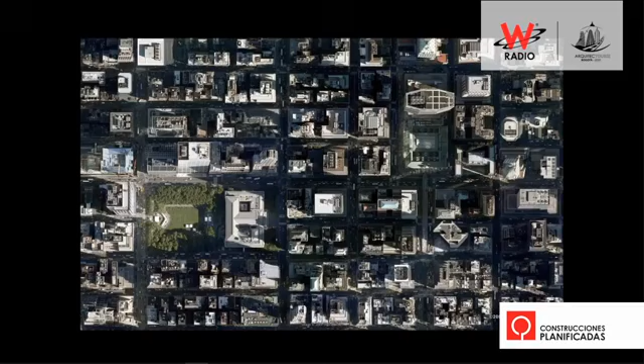First, let's look at the way these giant rooms are made. They exert a great deal of pressure on the city. Grand Central even exceeds the limits of our view as we approach it.

But Mauricio, I am hearing from people that they cannot see my screen. They do not see the slides. Let me see it. Someone is saying they cannot see the screen. I don't know, but I hope they can. Someone is alerting me, one moment. Can you see? Chevy, can you help by checking the screen, please? It seems the presentation screen isn't showing. Okay, now they can see it.

Okay, perfect. So I'm talking about the idea of large rooms, important in shaping the city, and the analogy to great interior rooms. It is this reciprocity between architecture as it makes great rooms and the way the city itself forms great rooms that I'm most interested in.

So here, a great interior room, Grand Central. Here, a great exterior room, Bryant Park—just as important as the great reading room in the library next to it. This analogy between rooms, inside and outside, this is one issue.

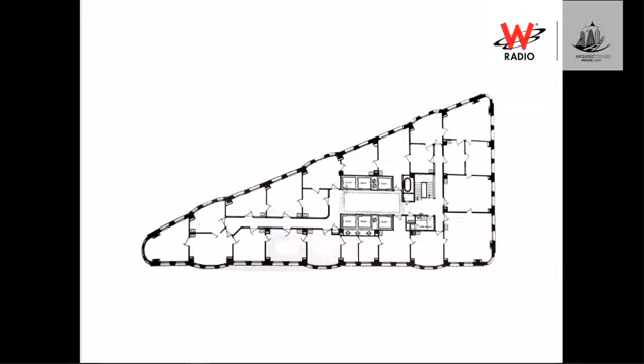This is the Flatiron Building, like a hinge that pries Broadway away from Fifth Avenue. Look at the way it distorts and transforms the plan of a typical skyscraper. And now we look at the Barclay-Vesey Building in Lower Manhattan. It's a parallelogram in plan, and just beyond it is the great Woolworth Building, the orthogonal version of the Barclay-Vesey. The Barclay-Vesey is like a distorted axonometric drawing of a more typical, idealized building.

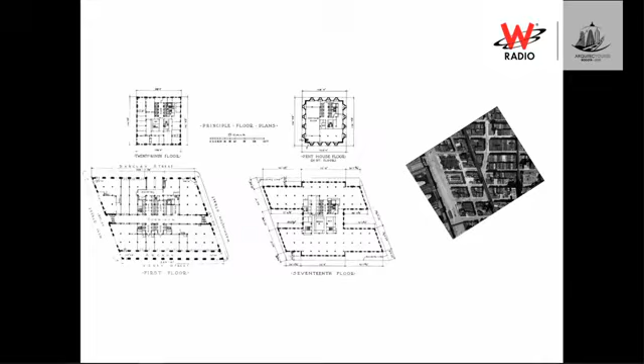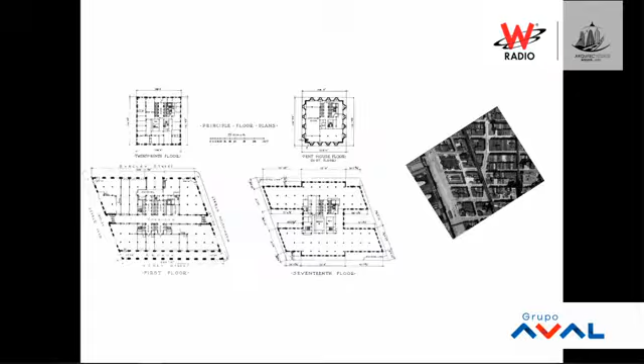You can see how the plan is wrapped by the plan of the city. The interior articulations, even to the level of details, are struggling with the negotiation between what has to happen to various rooms and how the whole building is shaped according to being part of the city. This reciprocity between rooms inside and out, and the way buildings are formed to be part of the city—these are two ideas that have been shaping all of the work I've been doing.

Let's look at a remarkable thing that happens when a very different paradigm of urban interior space is made by Frank Lloyd Wright. This is a space that brings into it another idea, even more important one could say than the great rooms of New York, which is the sidewalk. The sidewalk is extended into the interior and becomes the means to move through a great room, to rise up into this enormous room to witness all of the art and people in it. So he has made a room out of the sidewalks of the city, one continuous spiraling sidewalk.

This is such a deeply inspiring idea, to draw the city into and reform architecture in this way, creating a whole new paradigm for the museum. This is the moment when the city transforms what an institution really is. In this sense, for the first time, we have the gallery, the giant cabinet of curiosity, a kind of single room that collects so many things and becomes scaled in a wholly new way.

This was the inspiration for the first project. I will show you the Tel Aviv Museum that Mauricio mentioned to you. It's exciting to have art and people together conjoined with an experience of movement, and to bring light into a building in this way.

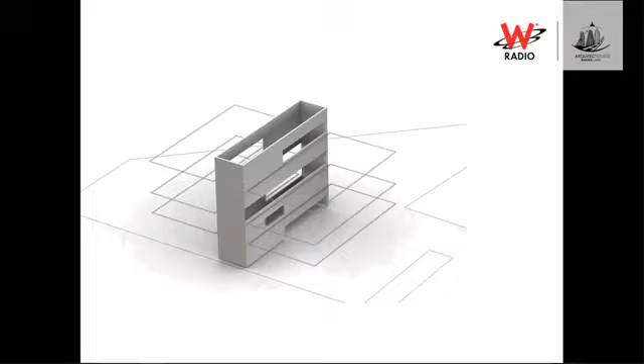It's a building that needed to be this way because it is very tightly packed in the city, shaped by the city in the way a building like the Flatiron is. A building so compacted, establishing a sequence all around it to the plazas and gardens around it. And then on the inside, because it is so deeply embedded in the ground, half underground, it is burying many of the galleries, and a light well is developed.

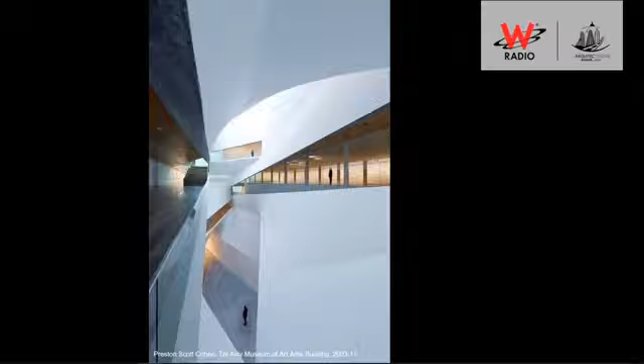That will turn and reflect light all the way down to the lowest reaches of the building. And so when we are discovering this space, we're actually in the middle of it when we arrive, halfway between what is above and below the ground. We're captivated by this interior experience, in a way unmoored and disconnected from the normal life of the city.

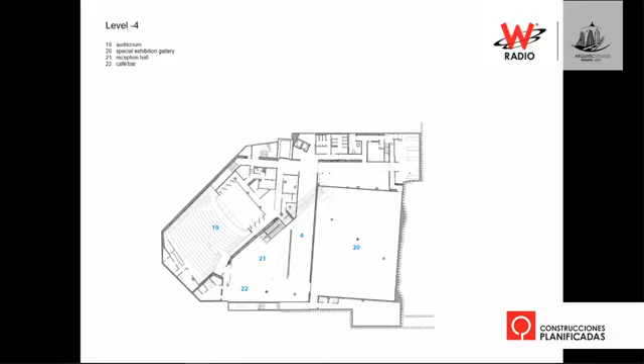This is because the plans are stacking up and rotating to different angles to adjust themselves to the site, producing this idealized form at the heart of the building, which becomes a new way to exhibit art. You will see many wonderful artists have responded to this space, doing critical installations—even an installation that totally radically alters the building as a critique of the building. This one by Mahama.

A building in Bogota. Great project—I've enjoyed so much working with Mauricio and his team at Construcciones Planificadas. It has been an incredible experience.

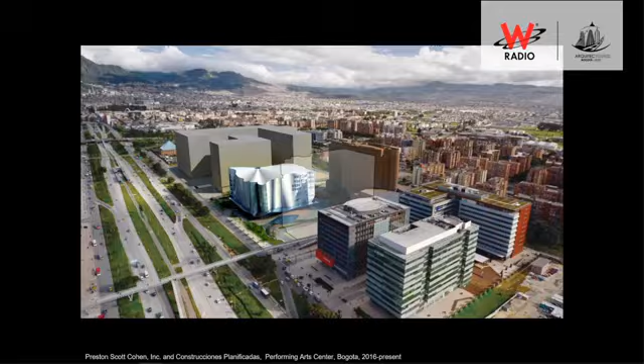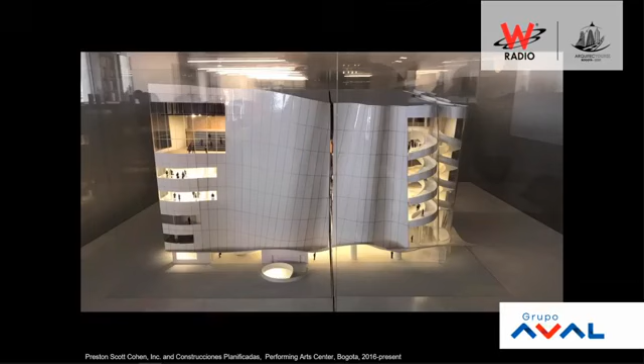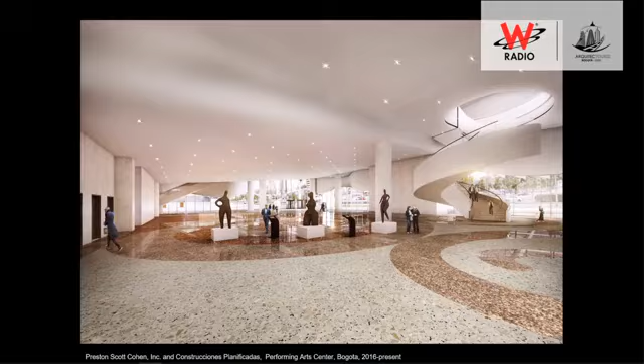Again, a building which is compacted by the site very densely. The site could barely support a performing center of the scale that we wished to put here. And so, like Tel Aviv, something very exceptional had to happen. The first thing was to lift the building and create an enormous interior lobby that flows directly in from the plaza. This displacement, this lifting of the theater, becomes something that makes it very distinguished from other performing centers of this kind, because we move into it and discover a sequence of such power and drama.

And we rise up into a plan that's constantly changing, as Tel Aviv's does, but in a very different way—very organically compacting the theater into a complex and interesting sequence of lobbies and public spaces for people as they move up to a second theater.

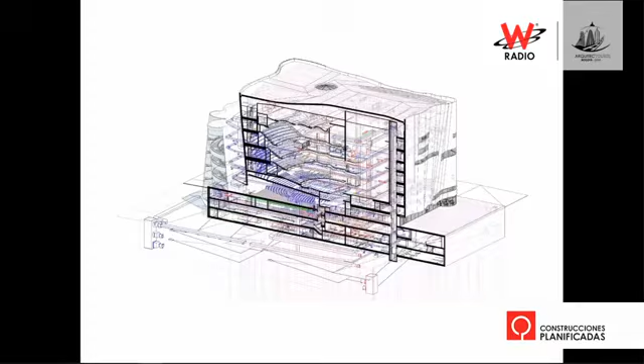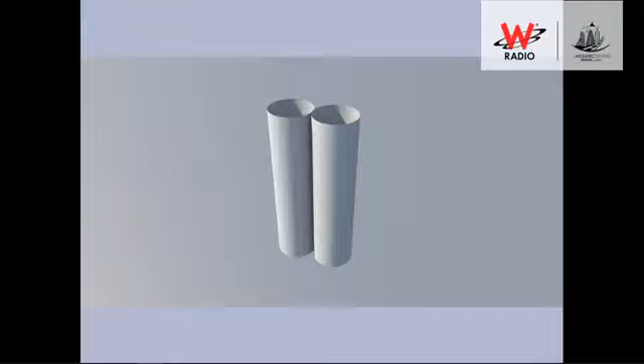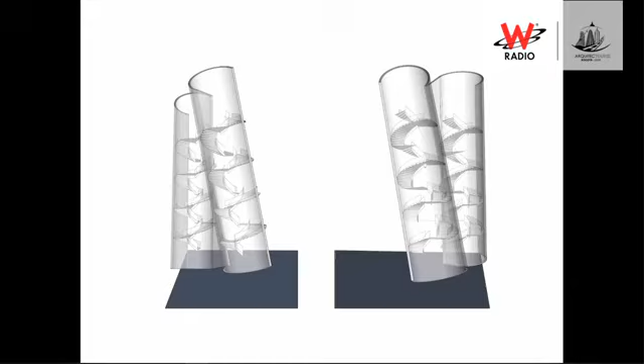You will see that this drama of the section is reformulated inside the primary performing space itself. It is this corner, this exceptional moment where two cylinders are rotated, only touching on a single point—two very extraordinary staircases, one to ascend and one to descend, very effective for social distancing, with a one-way experience of going up and coming down, and the two stairs creating a continuous form.

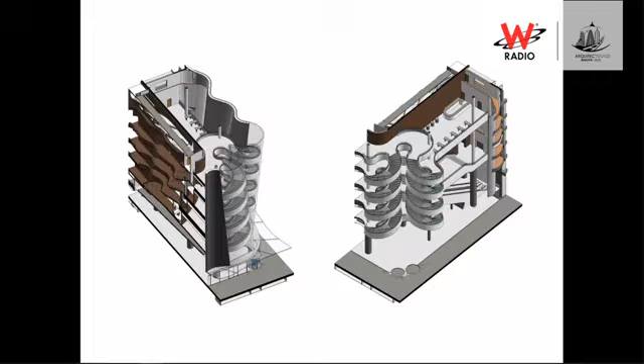This is an incredible experience to work on. Carl Dworkin in my office has modeled all of this to a very high degree, first in Rhino, then transformations through scripting in Grasshopper, and moving it into Revit, working with Santiago at Planificadas.

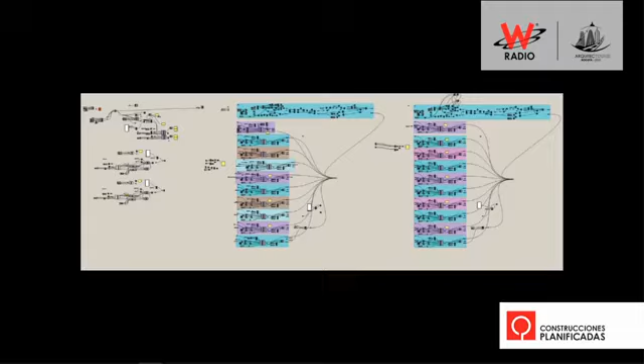It's been a very intense experience to understand how the parametric formation of the interrelation between the facade and the internal dynamics of the form, compressed by the city, have played out, like a curtain opening.

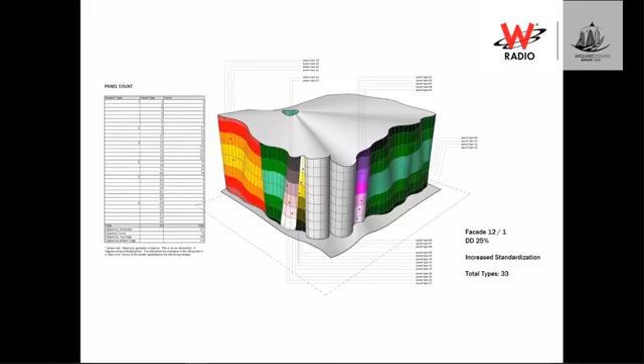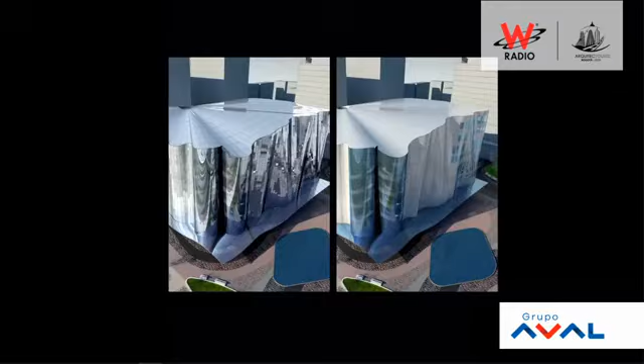Here you see transformations of the facade and how it was developed to be rationalized into a series of panels, of a certain type, reduced in number to give it efficiency even as it appears very complex. It is made of very few standard types of panels—another part of our effort to negotiate complexity with efficiency and standardization.

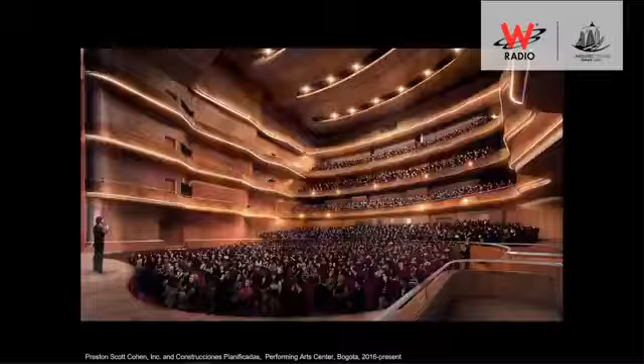The problem of thinking about the drama of the interrelation between the site and the interior space that gives life to the institution moves out of the city, but the same sensibility continues.

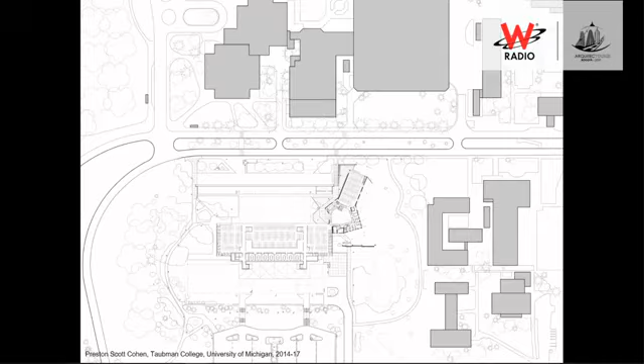Here at the Taubman College at the University of Michigan, we have this very enormous existing building to which we are adding this exceptional smaller piece. This piece has within it a very unusual space, a dramatic atrium, which turns the building in the site, reorients it toward the street, reaching it, stretching toward it.

And here you see an interesting resemblance to sawtooth warehouses and factories that are part of that context in Michigan.

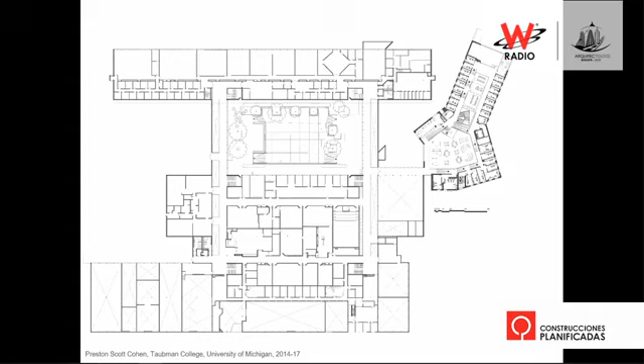But it is this enormous and interesting atrium that I want you to look at, and the way that by being a six-sided shape it can pivot the building into a very specific position to establish a sequence through the context, and really interestingly establish a new center to a building that never had an interior center.

This great room now is the social center of the whole school, even though it's on the edge of this complex. Two ramps, stacked and obliquely tilted since they're sloping, are bound together by a single staircase.

This kind of knot, again like in Tel Aviv, provides continuity between all of these levels, with different experiences on each—very different programs and different geometries defining the levels.

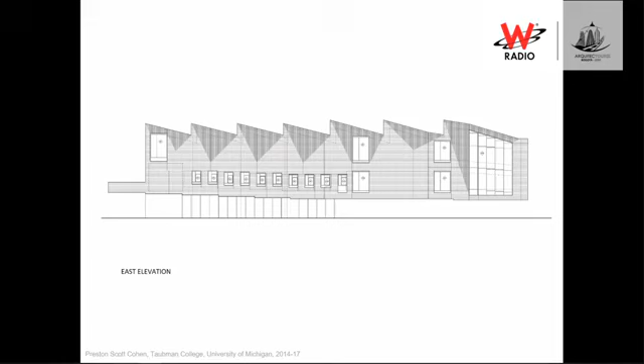Again, the panelization you see here is based on constraints to build with great efficiency, but within a very dynamic form nonetheless gives shape.

It almost looks like two buildings twisted over one another, just like Tel Aviv, but in a far more compacted way. The stair is very effective in creating this illusory experience of two buildings literally overlapped and turning relative to each other.

Again, the study of light is so important here, the reflection of light, as in Tel Aviv, but in this case to create this remarkable studio for the students. We actually tested the idea in our own studio in Cambridge, which has exactly the same angle and reflects light the same way, coincidentally.

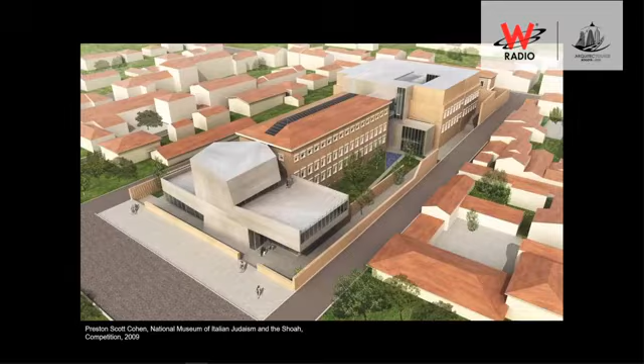It becomes a forum, a place of great excitement for students, for events, changing the life of the school dramatically. And we've done numerous projects where a main room is the focus, the addition of a room to a building that hadn't had one before.

This is an example for a museum in Italy. This is a really exciting project, again multi-sided, six-sided geometry, coincidentally—the transformation of a beautiful synagogue in Springfield, Massachusetts, Temple Beth El.

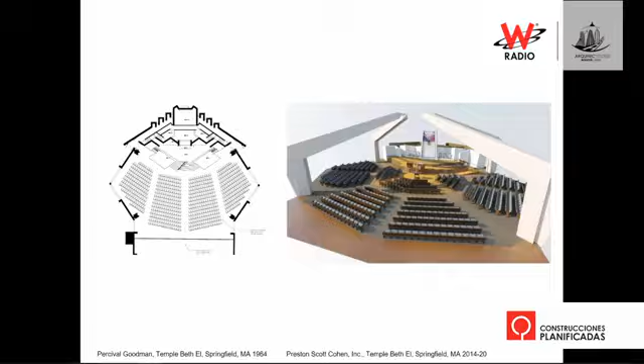Here, the transformation is much more subtle and powerful. We're looking at a building that had, on the left, you can see originally frontal seating. It was built in the mid-century when temples were very large in the United States. Today, we're trying to create a far more intimate environment—we are creating what we call a chapel within the sanctuary.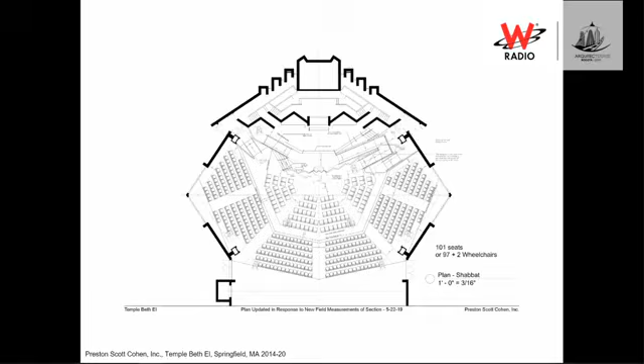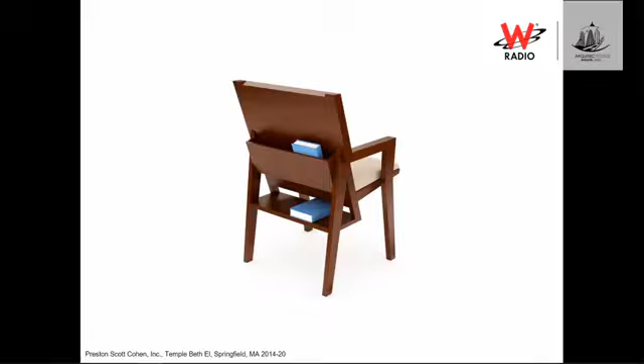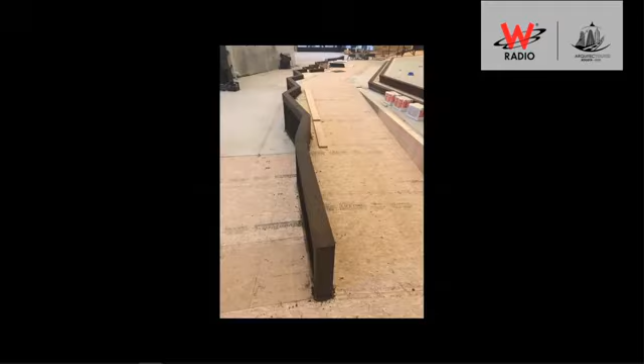This area for the services that occur weekly, the Shabbat services, is nested within the much larger context of a synagogue that can support the High Holy Days services, up to 600 people, while this smaller part holds only around 100. It's the very fine tuning of this part of the synagogue called the bima, and the way it becomes accessible by means of this ramp, the delicate railing, and the form of its own special platform.

That became very essential as we redefine the core of the space and make it concentric rings as opposed to frontal. The transformation from frontality to concentricity, space in the round, is a very powerful dialectic in architecture—whether a space is about forward-facing orientation versus moving in the round. Think back to Frank Lloyd Wright, a space developed in the round, versus earlier museums, far more dedicated to sequentiality, frontal movement, proceeding linearly.

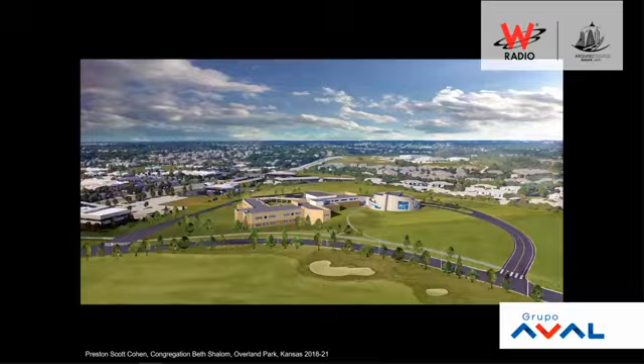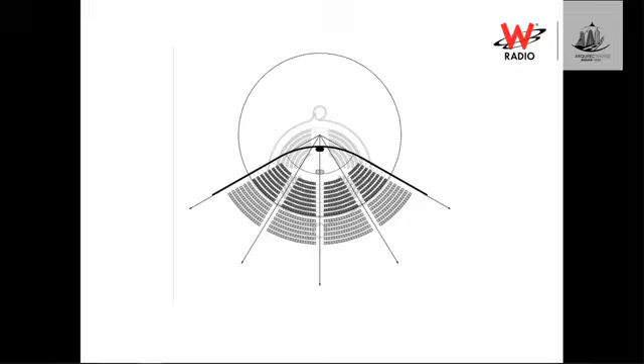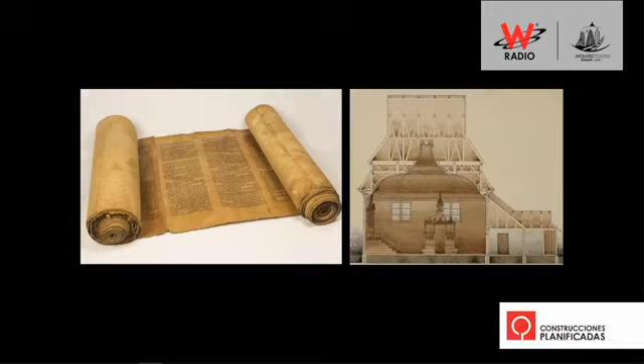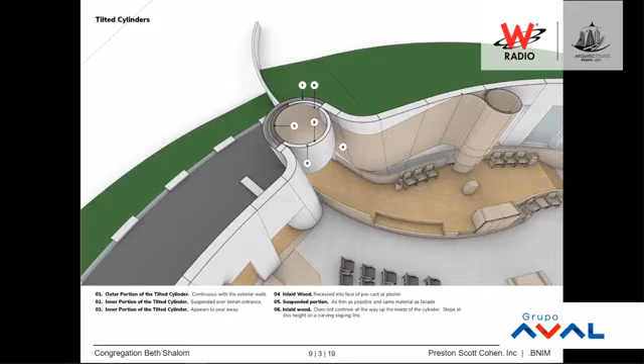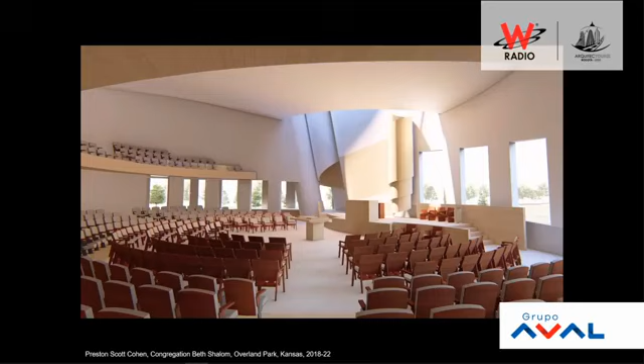The complexity of the form is difficult to contend with within the economy we're looking at here, but given the studies we're undertaking, we are reducing it to its essence. You can see the ritual of the bima is very intricate here, and the connection to the existing building is complex. The building has a very intense relationship with the ground, which is drawn into the interior, and this sense of collectivity intensifies the experience of the chapel within it.

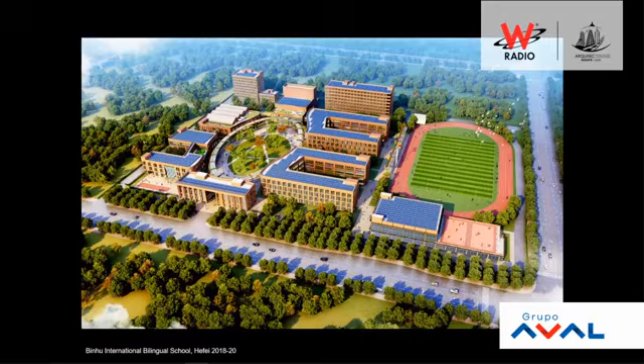And now scaling out, remembering this idea of the analogy of the great room of the city and the great interior room—you can see that while we were working on these two ellipses, this idea is very strong again. It's not so unlike imagining Bryant Park and the great reading room.

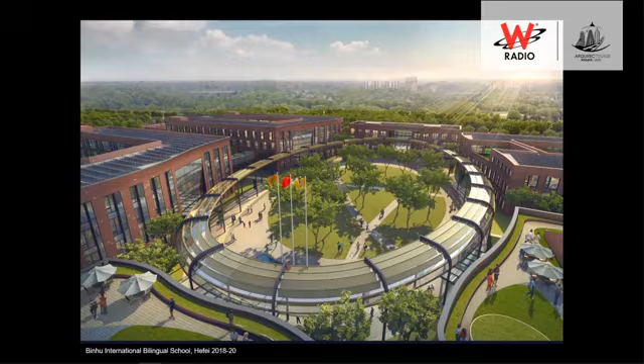Now we're talking about the design for an entire campus. This is an international bilingual school, K through 12, in Hefei, China. We designed the entire campus. It looks rather traditional to you, but this is a very radical idea for one reason: it has a single large yard in the middle of it, which is not typical for these schools in China. Usually the yards are broken into much smaller parts and distributed. We've centralized it and given it greater presence, making it a collective space for the entire campus.

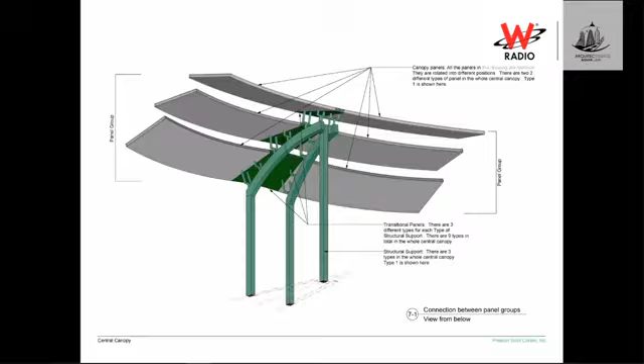It was thought that would push the buildings too far apart, and the client was quite uncomfortable about it. But when we made this an element of connection, they began to become excited about it. And it is, of course, this canopy that becomes so significant. Remember the Guggenheim, the linearity of movement that defines a centralized space—we're doing that again, but now we're on the outside, using it to connect the buildings and to accelerate movement and create excitement.

You can see how it exerts pressure on the buildings all around it, distorting them in a particular way, as if they are reciprocally formed by the urban idea. There again, that idea comes back: the city reciprocally forming architecture.

And occasionally a coincidence occurs. This was just a little bit earlier, an oval yard again, but we are only on the edge of this yard, offering this very exceptional building, the auditorium, the performing center for this small campus in Beijing. A curtain lifting, but not in the same way it lifts in Bogota, and a very steeply inclined auditorium.

Now to go back to New York, I want to shift to something—not only the street as the linear communicative social space, but the park, the linear park. We see Riverside Park on the left here, and we see that it becomes the High Line on the lower left. But there was another idea to extend this to become interior.

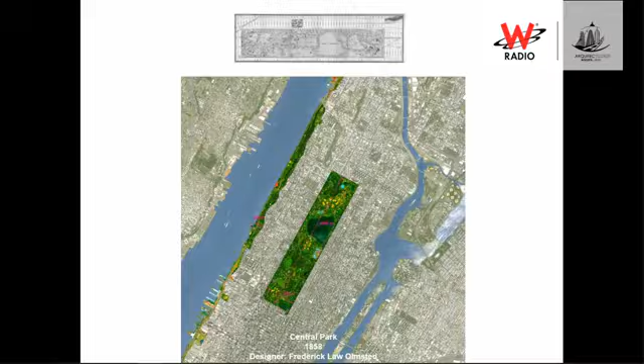I want to show you also the linear parks of Boston. They're very powerful and beautiful, again by Olmsted, winding their way through the city, offering a different way of moving through and connecting neighborhoods.

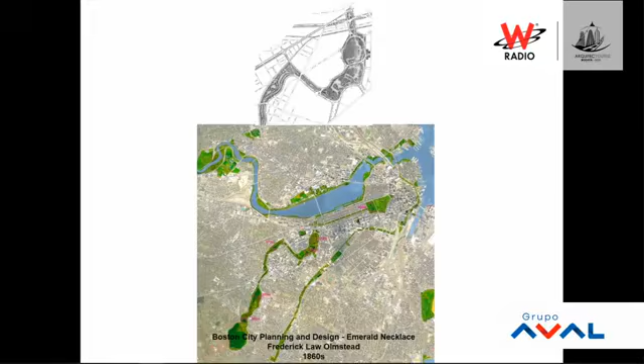Now the linear park has taken over many of the linear corridors of the city itself. The great streets are becoming parks.

And it is that combination, that transformation, just as Wright transformed the museum by bringing the sidewalk into the museum environment, now we see nature moving into these linear streets and redefining them as parks in a way.

We took this into the interior, at least as a concept, but keeping it outdoors.

This is the Goldman Sachs Arcade. It's adjacent to the World Trade Center. After the 9/11 disaster, this whole area was redeveloped. And there was an idea to return to the traditional arcade in this environment.

But an arcade, which is open air, we hadn't had those for quite some time in New York, not in this part of the city. And thank goodness it is for COVID. Again, the linearity works well if the traffic through it is regulated.

So we have the indoor lower ending to the High Line. It's the culmination, in a way, of this linear park across along the western side of the island into this corridor. It releases you into Battery Park, just south of here.

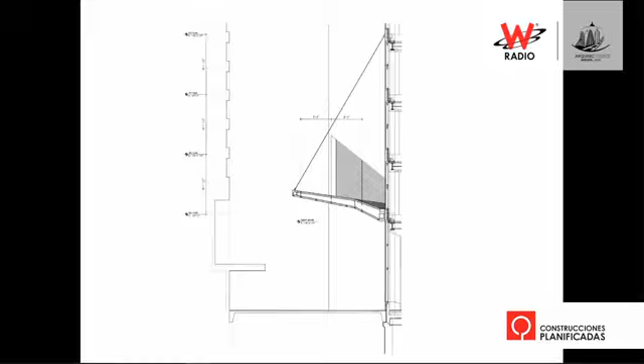This form is folded and is compressed by the buildings adjacent, which are bending. Again, a space that is shaped by the city. And you can feel that, the power of the city, which is forcing it to fold in its particular shape.

That is the beauty of this space. It seems to be as much composed by the city as by a geometric idea. And this extends out, again, moving out from the city with the same kind of thinking about it.

A linear path across a bridge in Taiyuan extends and develops a sequence through a museum. We pass through the building, but we remain outside of it, with views of sculpture, gardens, and some hints of what's happening inside. This sequence is what shaped the geometry of the building.

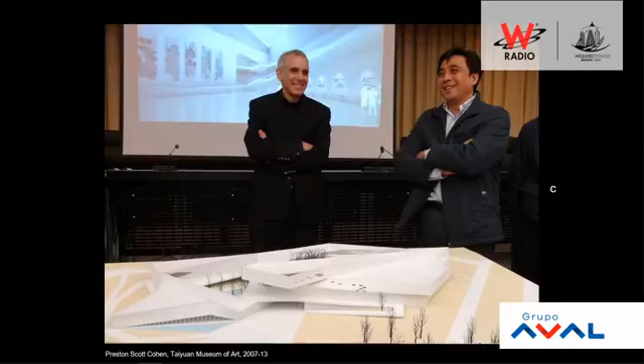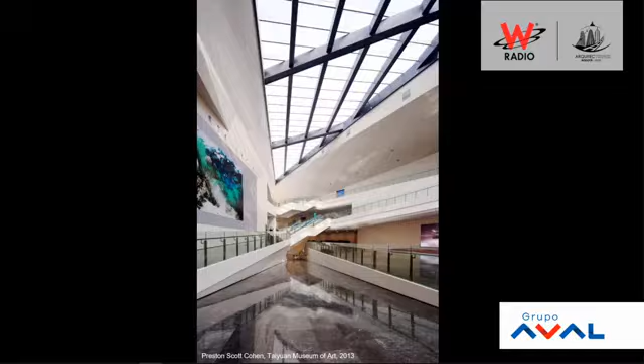And you can see that the building seems even to be squeezed by this linear element, this linear ramp. Again, on the interior, an analogous idea—it's almost like another version of the outside on the inside, a ramping form.

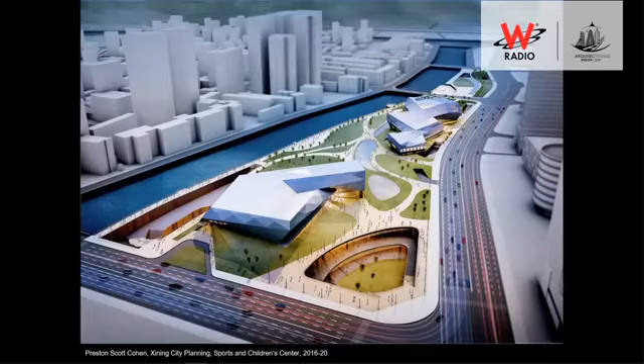Another project in a kind of riverway. This is in another city in Western China. And you can see how the buildings tumble along this riverway-like face.

This is just completed. That is an actual building, not a model, though it looks like one. Kind of remarkable to see it just freshly unveiled, having been scaffolded for about 3 years. This was quite a surprise to see.

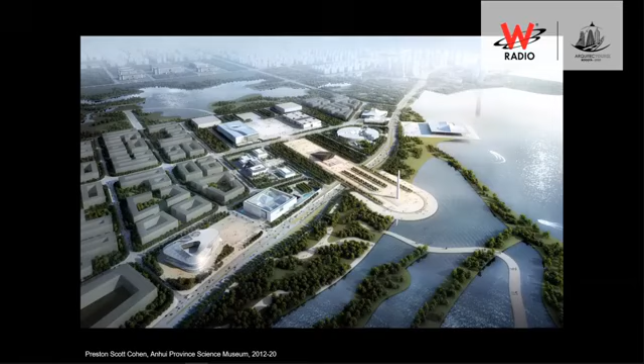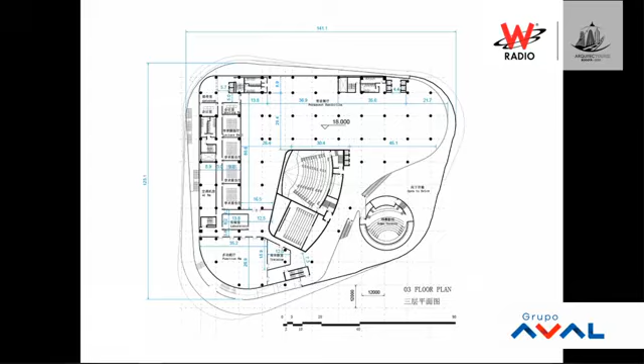And now under construction, in this riverway, actually running parallel with a much larger body of water, is the Science Center in Hefei, a building which turns inward and is primarily dedicated to the articulation of a space in which there is a very exceptional theater. It's a theater, of course, which is more than only a theater.

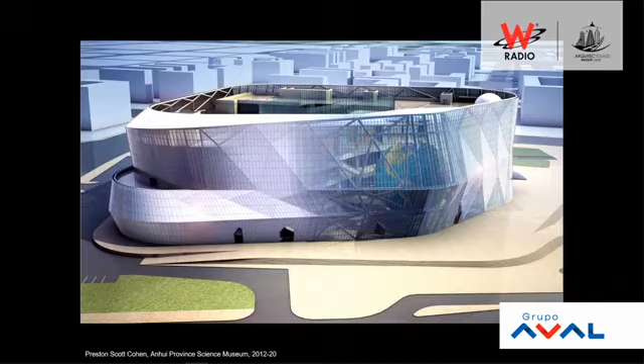And it also is a globe on the outside. It's a kind of incredibly interesting idea that we're still working with exhibit artists on. The geometry of this building developed around these very special moments, one of which will hold that theater as a sphere orbiting, implicitly orbiting around the building.

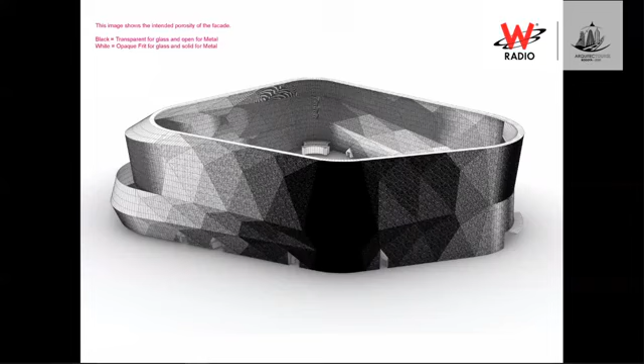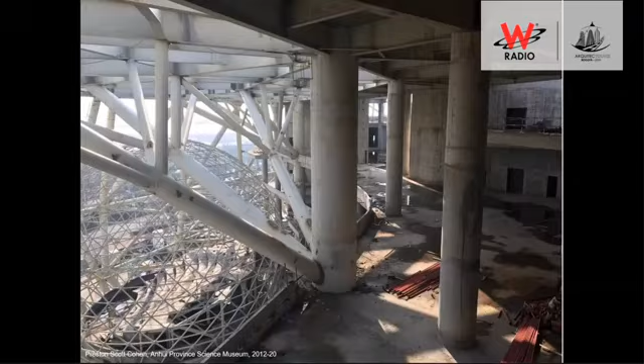This building has an exceptional impact in its scale, addressing a kind of territorial scope of space that it wishes to claim views of. It's really wonderful to see architecture foregrounding that remarkable expanse beyond.

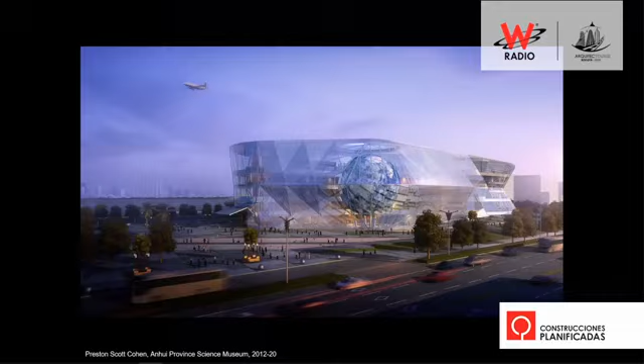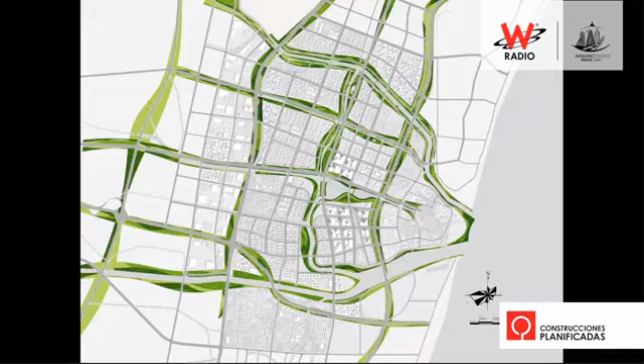And finally, we're moving out completely, networking these arterial parks. Imagine a series of riverside parks or highlines lacing through a city. This is a plan for a new city. And these parkways, something like the Emerald Necklace in Boston, become a network for defining different districts.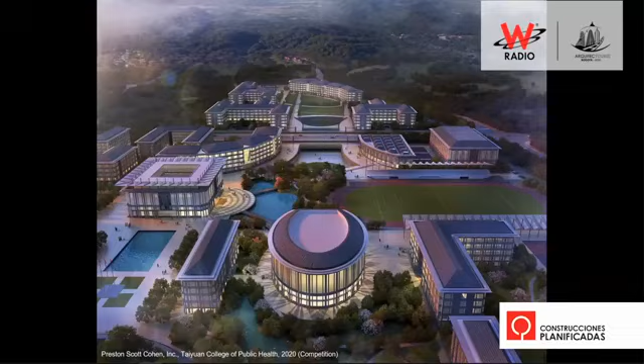At a more localized scale, we are developing that for another campus. You can see how the negative space is moving through, even as there's a kind of rigid, almost Beaux-Arts plan. Nonetheless, the park is something more dynamic.

The compression of this site forces, for example, the sports field to kind of invade the primary axis, as you see here on the right, disturbing the flow in an exciting way, so that it is a kind of synthesis between the picturesque Olmsted type of planning and the Beaux-Arts classical planning for campuses like this.

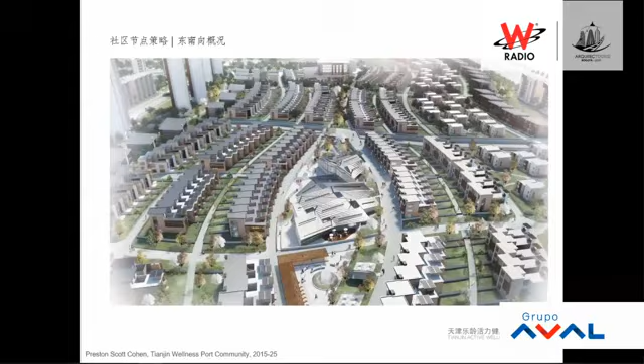Swelling and contracting spaces, crescents. I would say the inspiration here is from London.

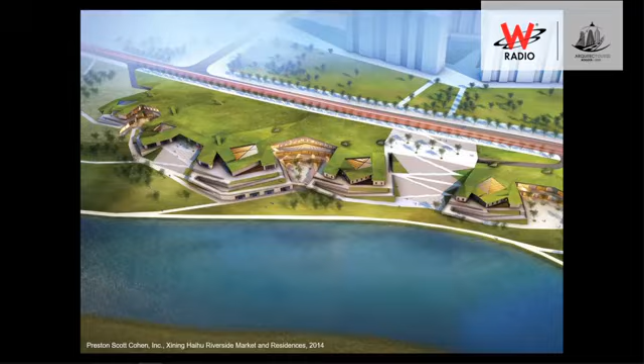And other projects in which we're embedding these exceptional courtyards, this idea of carving them not out of the city, but out of the landscape. This is a wonderful experiment to create courtyards in an entirely new way. And you see here the analogy between indoor and outdoor courtyards again.

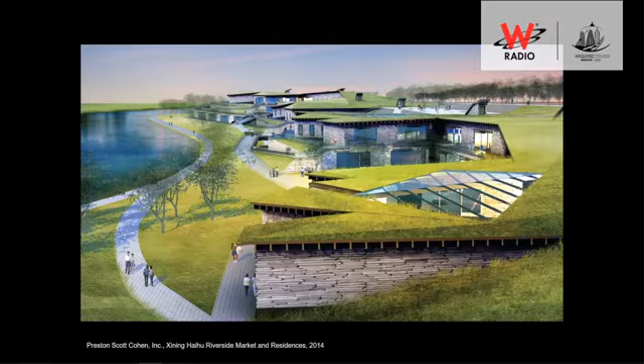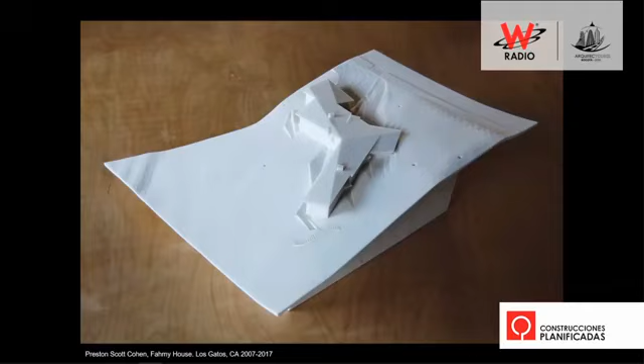I'll conclude by saying it's interesting to scale architecturally and mentally, and to recognize the connections between urban and domestic space. We're all in a kind of landscape. And when we are in our homes, we find ourselves in contexts very much connected to the territorial scale. This is a house in California that assumes a similar form to that project in China, folded open, like a pyramid that was split and

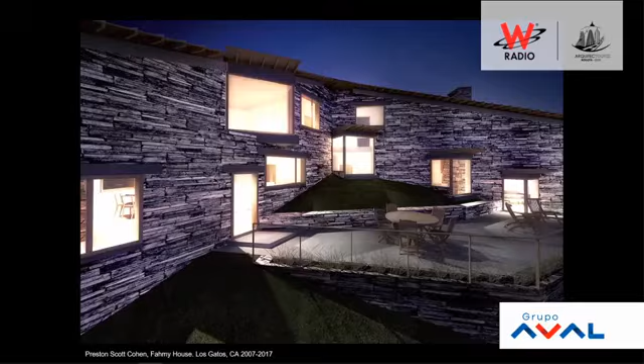transformed. And you see that the rooms inhabit this like a deep wall embedded in it. These independent windows and spaces are all referencing one another, sequenced in an interesting way on the interior.

I just put some of these ideas out for you to consider, and I would love to hear your thoughts and questions, because that's the most interesting part for me. So thank you so much for allowing me to present these ideas.